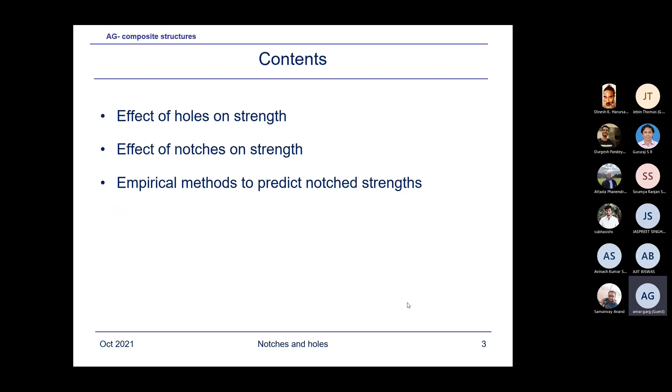Just a disclaimer, don't worry. So the contents are: effect of holes on strength, effect of notches on strength, and empirical methods to predict notch strength.

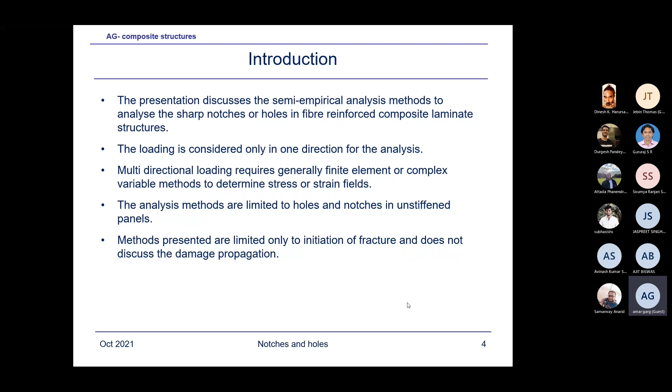As an introduction, the presentation discusses semi-empirical analysis methods to analyze sharp notches or holes in fiber reinforced composite laminate structures. We are not talking about metals in this presentation, it is only limited to composites. The loading is considered only in one direction for the analysis, so it's a limitation of these methods. Multi-directional loading generally requires finite element or complex variable methods to determine stress or strain fields. The analysis methods are limited to holes and notches in unstiffened panels, and the methods presented are limited only to initiation of fracture and don't discuss damage propagation. So this is just a brief background of what is coming ahead in these slides.

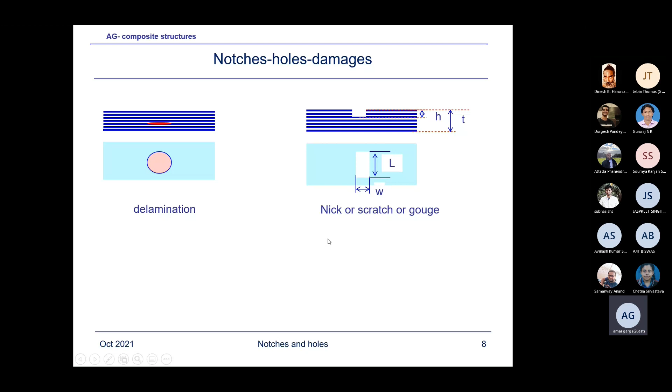Some of the issues: there are various types of damages in the composite, not all of which I have listed. Normally you won't have a clean hole like what I've shown in practice - on the structure there will be jagged holes, damaged holes, notches and slits which are sharp notches, and impact damages. You may also have delaminations, scratches, and other damage types, which I will just be touching on.

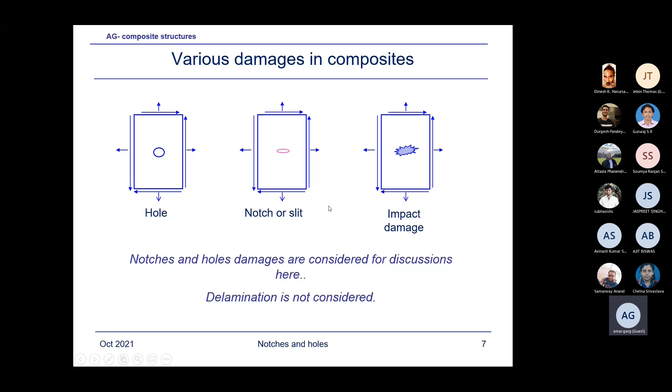The main thing is, once again, only unidirectional loading is considered - multidirectional loading is difficult. So I'll just be discussing the limitations of the methods.

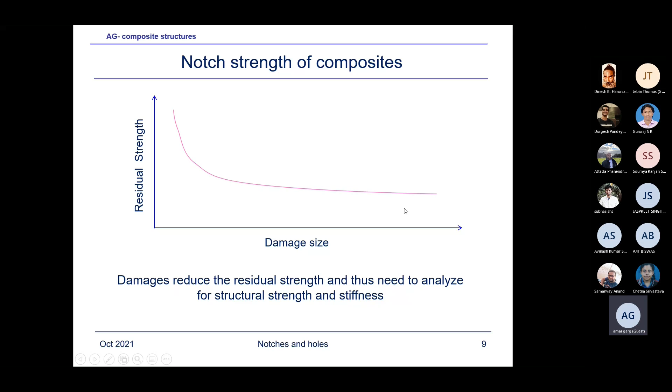Suppose the panel becomes very large, then for the holes, of course, the residual strength approaches asymptotic behavior, but for the crack it will keep on going down, which we'll show later on.

Issues for damages in structures include irregular damage shapes requiring idealization. So what happens is, when you want to analyze it, it's very difficult to analyze irregular shapes, so you have to approximate with some kind of regular damage shape for the analysis.

Then prediction of residual strength - the methods are very much limited in their applicability, which we'll discuss. Prediction of fatigue behavior is extremely difficult in composites. Prediction of damage growth is extremely difficult in composites using any of the methods available. Also the effect of materials and structural details on static and fatigue strength and various parameters.

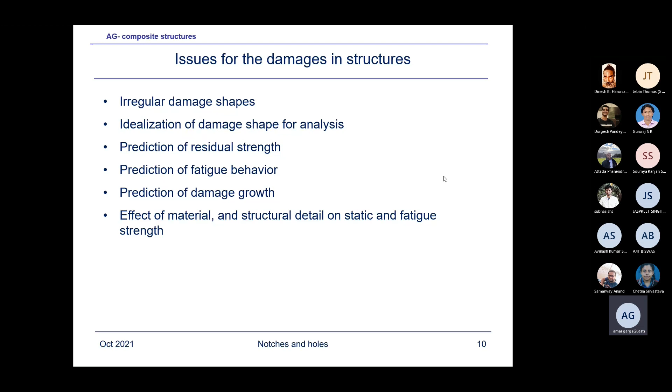So, damage analysis - circular holes, sharp notches - that's what we'll be considering now.

In this slide, what we are trying to show is the stress distribution ahead of the hole. In order to consider the effect of the hole on the residual strength, we use the stress distribution around the hole. Of course, this is only for unidirectional loading - for multidirectional loading we do not have any analytical expression available in closed form. We can analyze unidirectional loading easily, but not multi-axial loadings.

So here, what you see, Sy is the stress distribution ahead of the hole edge, and this is given by this function of R, and the distance from the edge of the hole is X.

Now if it's an isotropic material, you would consider isotropic material, KT is 3. So if you put 3 here, this is nothing but the expression for the isotropic material.

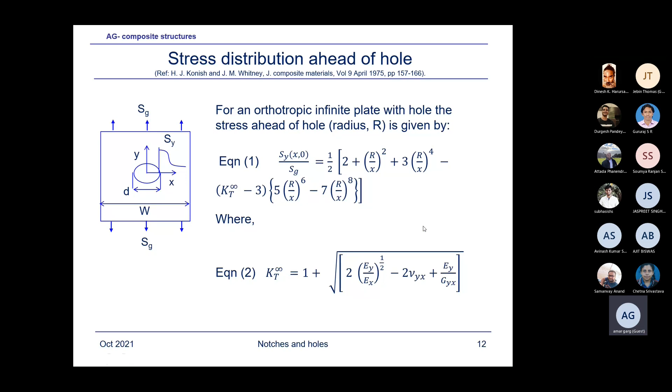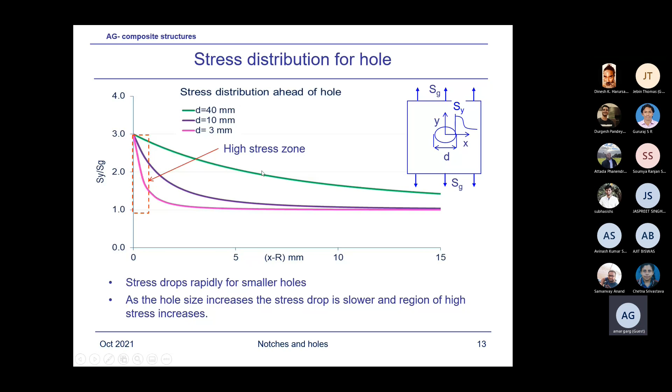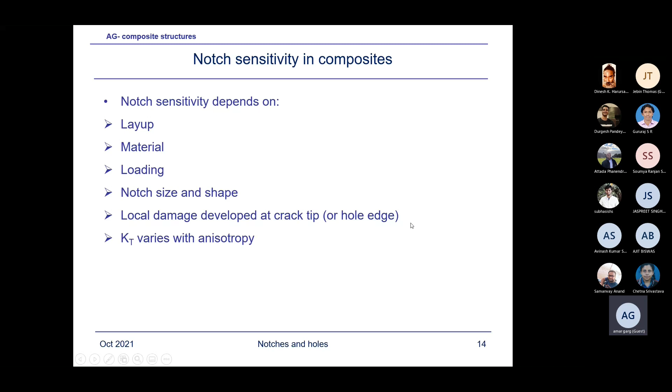Okay, notch sensitivity in composites. Notch sensitivity exists because the laminate or material is sensitive to the notch, and the notch sensitivity depends upon the layup, material loading, notch size and shape, local damage developed at the crack tip at the hole edge, and KT varies with anisotropy. I've just shown, based on this equation, this KT infinity...

Trying to give you an idea how the KT, which is 3 for the isotropic material, as you can see here. This is the 3 value for isotropic or quasi-isotropic material. But as the anisotropy increases, as you can see, the KT can reach almost 7.

What we mean by anisotropy, the percentage of 0-degree fibers along the load direction keeps on increasing for a layup. So if you have a unidirectional layup, say 100% zeros, that is a tape laminate, and if you drill a hole in it and try to load it, you will find the anisotropy. Due to this, the stress concentration factor is almost 7.

Whereas if you have 0% zeros, or suppose you have a 45 laminate only, plus minus 45, you will find the stress concentration factor of 2. So there's significant variation depending upon the type of layup we have, on the stress concentration factor. It doesn't happen with the isotropic material. Isotropic material is always 3.

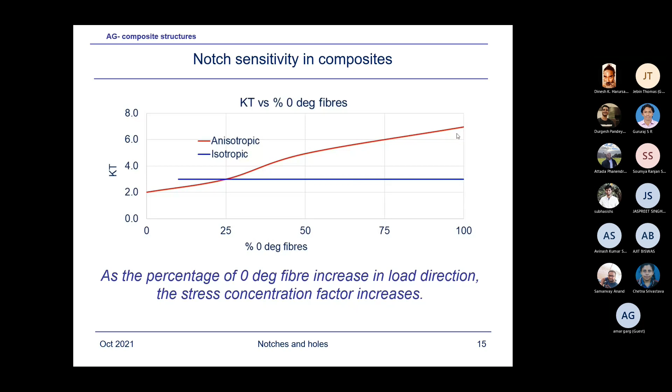Next is the stress distribution for the crack. Similarly, we have SG, the gross stress. So I have written here SY at X, 0, at Y equal to 0, is equal to X upon root of X square minus C square. This is from fracture mechanics considerations.

Now, what you would notice, this functionality for stress distribution is not dependent upon anisotropy. There's no anisotropy term appearing in this, whether it's isotropic or anisotropic, the behavior seems to be the same as far as the stress distribution is concerned.

Okay, now I've just plotted the stress distribution for the cracks. As you can see here, if you have a smaller crack, 2C equal to 5, then you find the maximum stress at the crack tip, near the crack tip. Of course, right at the crack tip, theoretically, if X equal to C, right at this edge, the stress becomes infinite.

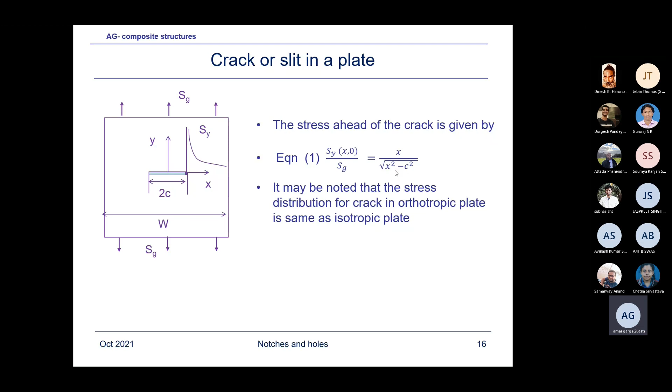That's a stress singularity, theoretically, from fracture mechanics. So here, of course, we have not gone to X equal to C because that would approach infinity. But what you can see, just away from the crack tip, the stress keeps on increasing as you increase the size of the crack.

Whereas we saw for the hole edge, right over here, X equal to 0, here X minus R equal to 0, the value SY upon SG does not change. It remains the same, like for quasi-isotropic or isotropic it's 3, whereas for the crack, it is a different value.

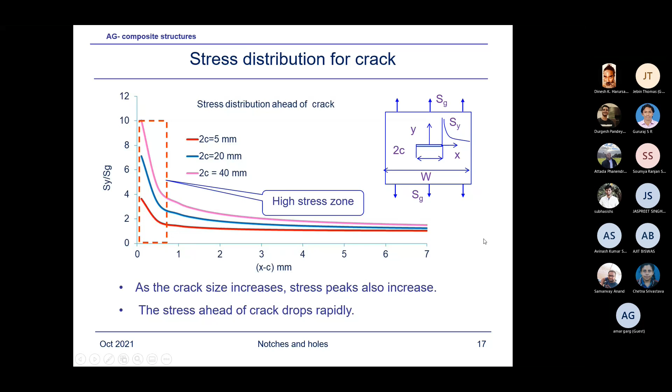Here I compared the stress distribution for the crack and a hole just to illustrate the difference in the stress distributions. Now, if you see the dotted line, this is for hole diameter of 5 millimeter and crack also of the same size, 2C equal to 5. What you see here, the stress distribution for the hole and the crack is very close to each other if the crack and holes are small.

But if the crack increases in size, like 2C equal to 40 millimeter, a long crack, and hole is also 40 millimeter diameter, what you are seeing from this stress distribution is that this is for quasi-isotropic. Hole stress has to be the same as we have seen in previous graphs for the hole. And then you have some gradient here.

But for the crack, this stress keeps on increasing significantly, and in this region, very high stress. What this tells us, if you look into this stress distribution, is that a 40 millimeter hole doesn't seem to be as critical as a 40 millimeter crack. Whereas a 5 millimeter crack and 5 millimeter hole might land up into the same residual strength. So that's the difference between the crack and the hole.

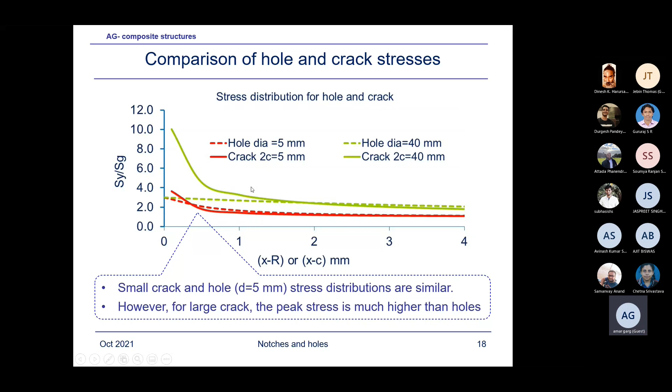Okay, so this is just a description, I won't go into the details of this slide. I just tried to show qualitatively what happens here, because this is important to understand all the empirical relations which have come up to predict the residual strength of a hole or a crack, based on this phenomena we are showing here.

This is similar to plasticity in metallic materials. As we start loading the laminate, at smaller loads some kind of small damage starts. Initially, the 90-degree fiber layers - the matrix will start cracking, transverse to the load direction, in the 90-degree plies, right near the notch or hole tip, because there are high stresses there. So naturally, when stresses are high, it leads to damage initiation.

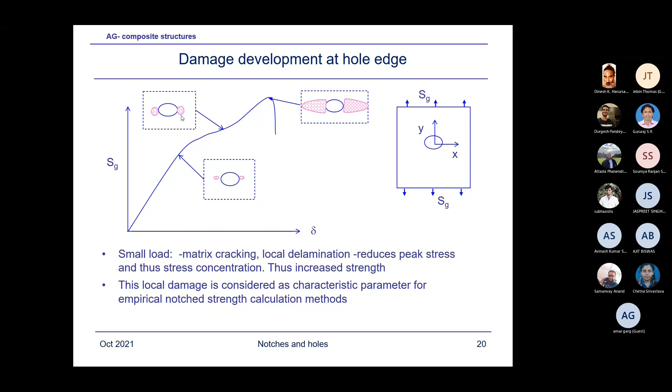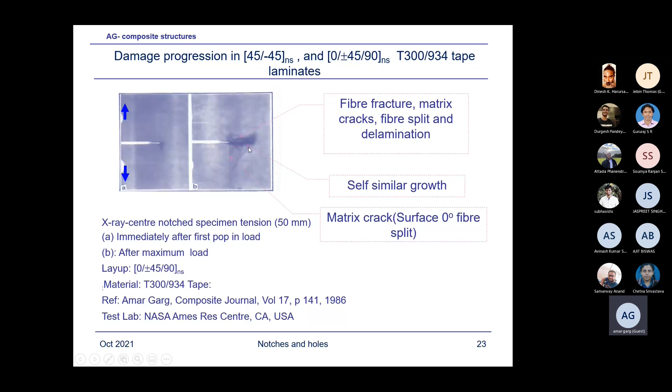Another one, this should be 0.90. Now, this is a bad layup. In practice, you would never use it. It's terrible because it will lead to delamination. As you can see here, in the loaded hole, near the loading hole only, the plies have delaminated.

What I had seen at that time, I didn't realize this is pretty bad, which I would never design like this, of course. But this gave me a good feel. I found that at this interface, it just delaminated into two parts. Clean delamination, virtually split.

I was talking about interlaminar stresses, and this is due to the interlaminar stresses. Very high interlaminar stress will exist because you are clubbing or bunching of the 0-degree ply and 90-degree plies. So you create very high interlaminar stresses, which is causing the delamination, as you can see here. It's a true thing, and you can see the effect of high interlaminar stresses, bunching of the plies together. So it's a good phenomena which is observed.

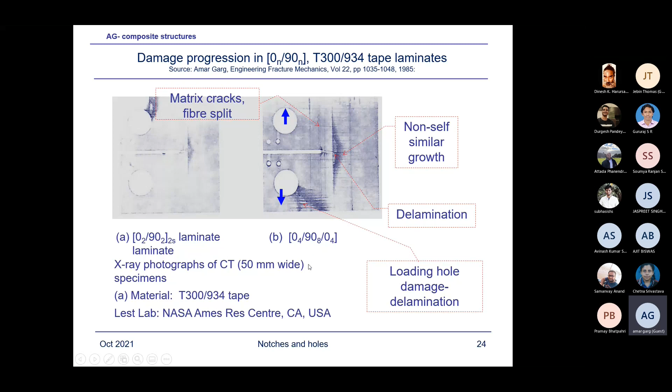Similar pictures, other damage propagations. Now this is not my work, this is from NASA, Christopher Poe's work, which I just take in to demonstrate. Suppose you have a unidirectional layup, then what happens? You will expect this is the original crack. And when you are loading this, you would find the crack cannot propagate this way. There are fibers, so it has to break the fibers.

The simplest path is because there is a shear stress existing right near the crack tip, and this shear stress causes the split. So the crack will propagate along the load line. This is a load line along this one. And as you can see, the crack is propagating along the load line.

I also experienced in one of my studies with a unidirectional laminate that it just split into 3 parts. This is separate, this is separated. So 1, 2, 3. Clean.

0 to 90S layup, also because there are a higher number of zeros, you find even though there's a 90 layer, still the crack is propagating along the load line. So why I wanted to show you this effect, we call in our study self-similar crack growth and non-self-similar crack growth. If the crack propagates along this line, that is self-similar, otherwise non-self-similar. The importance over here is that in composites, you would rarely see self-similar crack growth. They are non-self-similar.

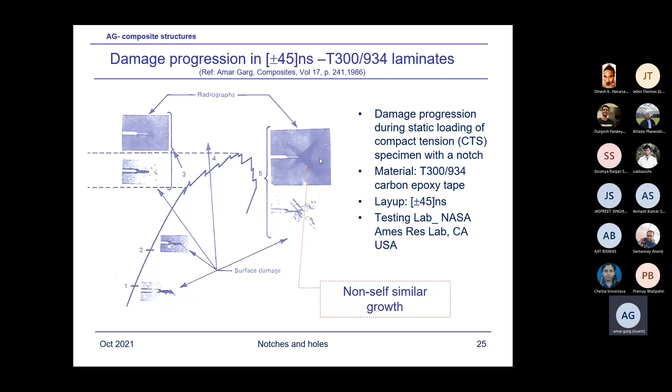Limited applicability to multi-directional loading, because our analysis methods are limited to only unidirectional loading here, and not suitable for non-self-similar damage growth. If you want to consider this phenomena, that is crack deviating from the path of the original crack, then these methods are not applicable. That is being predicted by using the FEM methods.

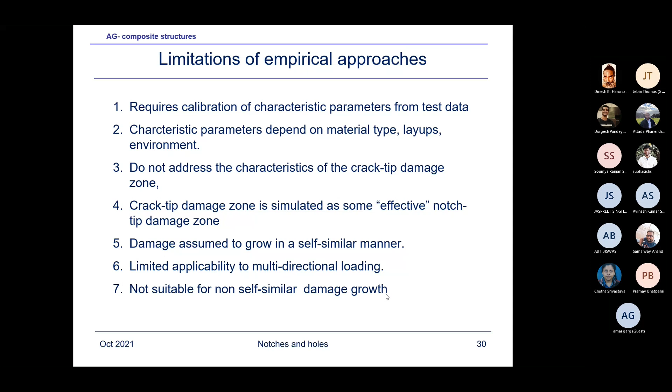There are lots of methods where crack growth studies have been done in composites. Damage growth in composite can occur by intralaminar damage or interlaminar damage. Intralaminar damage, that is within a ply, includes transverse matrix cracking, fiber microbuckling, fiber failure, fiber pullout. All these modes are considered when people model damage growth in composites using the finite element method. There are lots of methods available, but not a closed form solution for any of this. Interlaminar damage is the delamination, and there is damage interaction coupling.

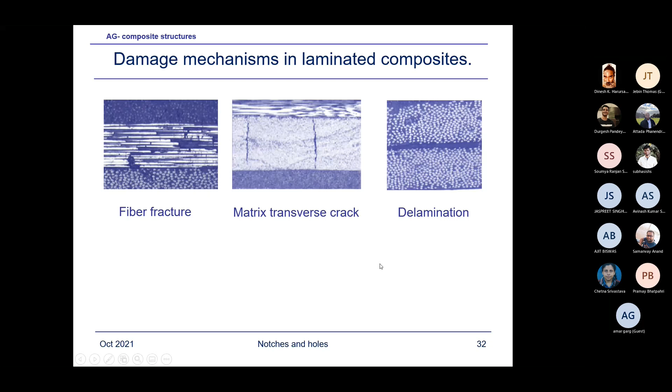Some pictorial presentations show fiber fracture, matrix transverse crack, and delamination. Damage growth methods present the laminate as a homogeneous and anisotropic material, with intraply damage, interlaminar damage, and continuum damage mechanics, where damage is represented by a reduction in corresponding stiffness. I won't go into the details of this.

I just wrote some points about damage growth methods and interlaminar damage, interface fracture modeling such as cohesive zone models and virtual crack closure. These are being pursued a lot. In fact, tomorrow I'll send you some references about this and also these ones. So those who are interested in pursuing further studies, an interesting area, or maybe PhDs, can use it. Damage interaction coupling, okay, I won't go into that.

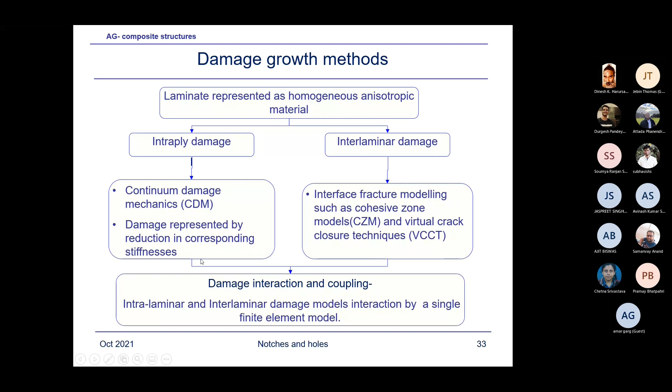Now, notches or holes, residual strength evaluation. Holes first, I'm considering. Now, the basis of point stress. One of the things, in fact, there was a reference about one of the publications by Waddoups in the beginning, and I said I removed that work. I used to have those slides, and I thought it's getting too much.

But what they did, before, in fact, Whitney and Nuismer published their work in 1971. Vadoops and their team, I think they were at General Dynamics, studied some composites with holes. So what they did, they loaded a hole of about 3 millimeter, 4 millimeter diameter in fatigue, loaded for about 1 million cycles. Then after loading for about 1 million cycles at a certain loading, they then loaded to static because the failure had not occurred.

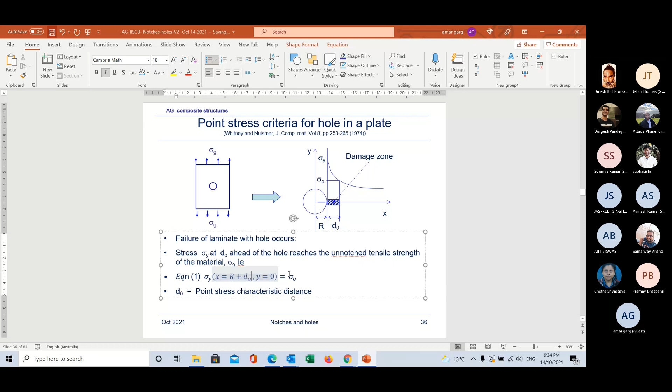That is, sigma y at x equal to r plus d naught. This is an error here, the comma should be here actually, and this should be sigma y equal to 0. So this should be deleted, sigma should be deleted, let me delete it here. So x equal to r plus d naught, y equal to 0.

So sigma y is sigma naught. That is when the failure would occur. And d naught is the point stress characteristic distance.

Now we had written down this expression, sigma y upon sigma naught. This is the stress distribution. So that means the failure occurs when x is equal to r plus d naught. If we substitute here, instead of x, r plus d naught, and solve this equation, that will give this equation, sigma n infinity. We are providing the infinity letter because this is for an infinite plate.

And if it's a finite plate, in terms of the width of the plate compared to the hole, the functionality of that we call the finite width correction factor, which will apply. So this is for an infinite plate, when the hole is small compared to the plate size - this is the expression for the residual strength, where xi is equal to r upon r plus d naught. D naught is the characteristic dimension, r is the radius of the hole.

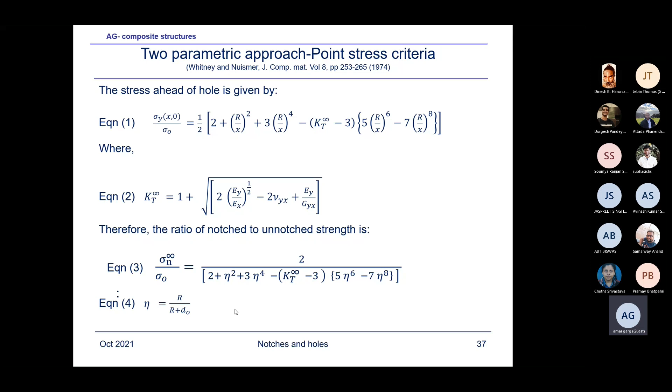You have to determine by test the value of sigma naught and d naught using notched coupons and unnotched coupons. So characteristic distances are determined by test. Determine the unnotched strength, sigma naught, of the test laminate by testing unnotched coupons. Determine the notch strength of the laminate specimen for the hole size - suppose this is a D diameter, so test this coupon.

Determine the appropriate KT for the laminate. Using the ratios for the notch strength, calculate the characteristic dimension D naught from the test data. So in this equation, if you know sigma n, you know sigma naught, so the only unknown here is eta, which is a function of D naught. So you can calculate D naught using this equation.

The characteristic dimension d naught may vary with the hole size and layups, so there could be variation, of course. It is a function of the material, layup, environmental conditions, and hole size. So you might have to generate some charts in order to cover your design space for various layups, because in the design, you would be having various layups, various percentage 0-degree fibers, environments, and hole sizes. So you have to cover for all those parameters, generating charts of D naught as a function of percentage 0-degree fibers, hole diameters, layup sequences, and so on, whatever the parameters are for the environment of the design.

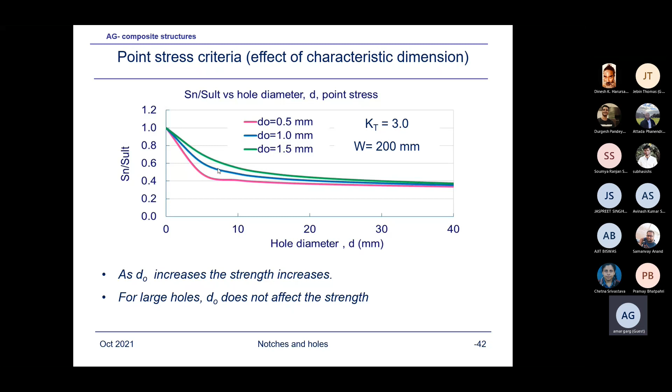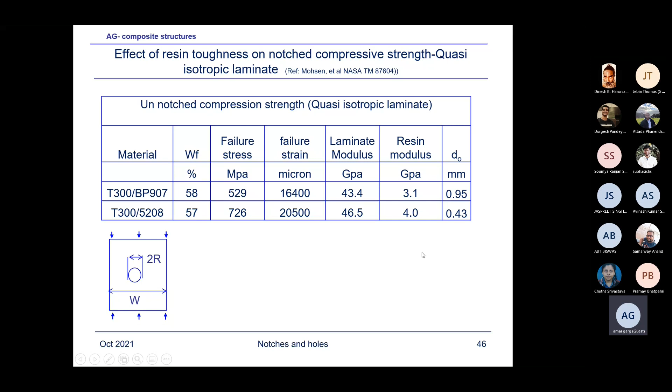I think the hole diameter is 6.4 millimeter, quarter-inch, if I'm not wrong. So failure stress is 529 MPa and 726 failure strain, characteristic dimension, and as you can see here, resin modulus 3.1, 4.

Hello. Hello, yes. Sir, good afternoon. Sir, before applying the point stress criteria, each and every time we have to calculate the D naught value.

The thing is, when you are applying the point stress criteria, you need to calibrate your D naught using the test data.

So what happens, suppose in the design office we are working and we want to predict the notch strength, the hole strength. We would have generated by test data various charts, as I said earlier. Normally we'll draw charts like D naught versus hole diameter for a particular material, and also as a percentage of 0-degree fibers for various layups. And that should be good enough.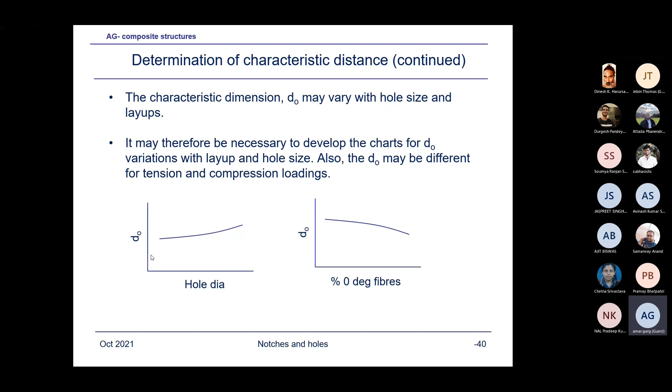And if you have a hole size greater than about 40 millimeter, as you said, then you don't need D naught, you just use this equation, KT — notch sensitivity, 1 upon KT. As I've shown here, in this region you don't need point stress, you can just use 1 upon KT.

So, right sir, suppose KT is 3. That means 1 upon 3, sigma naught by 3, is your residual strength for the hole. Simple. Thank you, sir. And this works well.

And that's why I've just put some data to validate this, to show you the utility of this method. And most of the time, I would use point stress criteria in the industry. I've used point stress quite often for predicting the residual strengths. So it's an important method.

Let me tell you that for an industry, it's an important method. It's simple, but very useful. This behavior is very useful — point stress over here, KT over here.

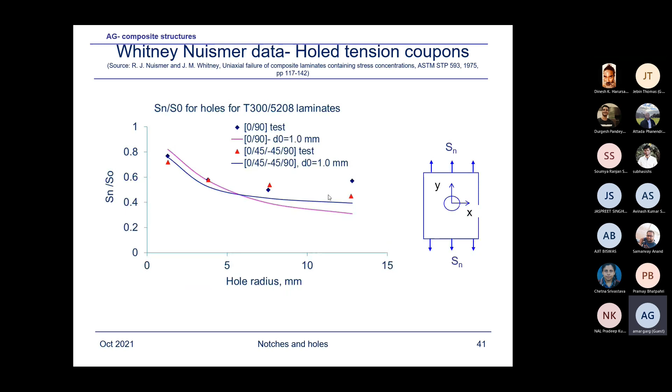I think what I can do is talk about the cracks. I'll stop here and invite some questions rather than continuing. So, any doubts, any questions so far on this?

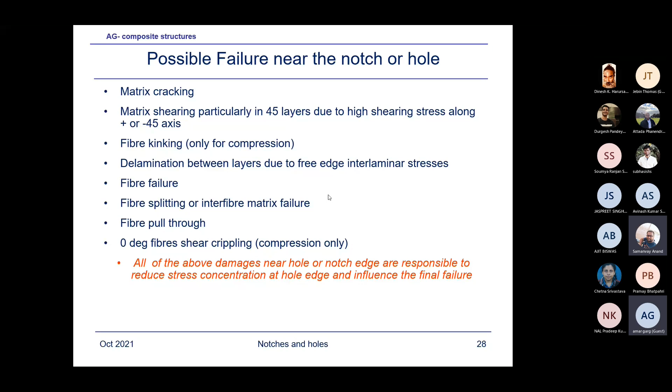Can you show the formula for the point stress method in the slide which you have? Okay, yes, let me just show you. Yeah, this one. Yep.

So this point stress method can be applied for both composites and metals, right? No, for metals we don't use this method. Only for composites we use the point stress method. That's right. And for metals, it doesn't matter how much.

What is the size of the hole? In metals, what happens? Because of the yielding, normally, if you're determining the ultimate load strength, you just use the net section stress, assuming that the material will yield, like aluminum.

And if it's a brittle material, you just use 1 upon KT. If there is no yielding, then the failure would occur with 1 upon KT straight away, even in metals.

If it's a brittle metal, the utility of this point stress method works because we are assuming this damage zone, which is relieving the stress concentration factor. If there is no relief, assume it is zero, that means the characteristic dimension is zero. And if it is zero, that means the stress at this point, when it approaches the unnotched strength, the failure would occur. So it's very simple, based on this stress distribution relationship and the damage.

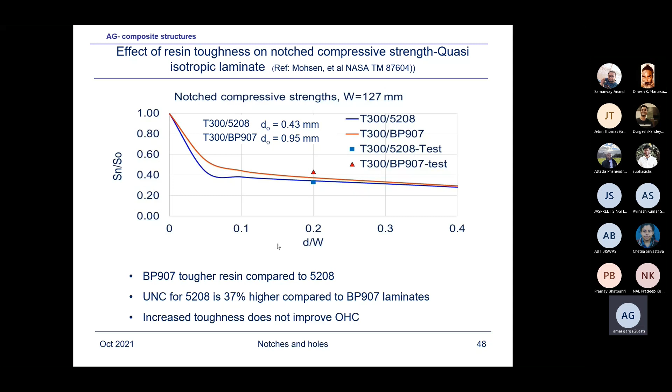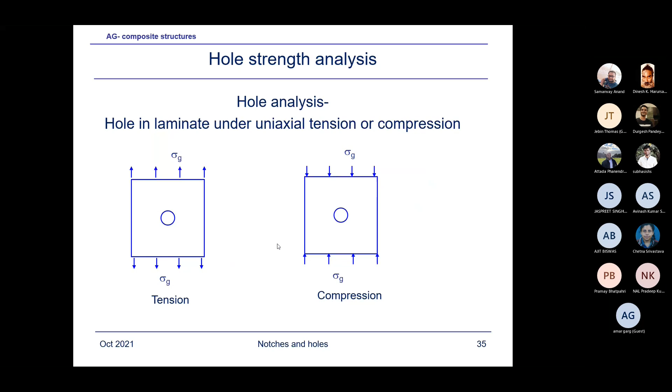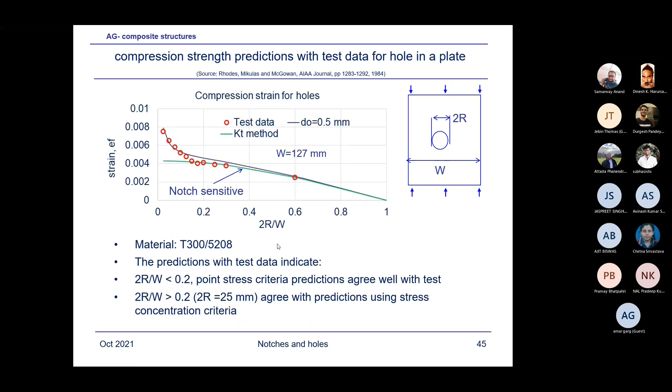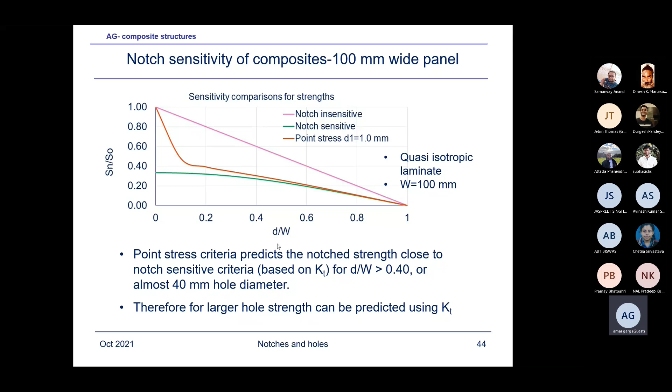So in fact, I wrote here that the characteristic dimension is a function of various parameters. Where did I put that? Might have removed it. I think I removed it while tweaking my slides - it used to be there. Let me see.

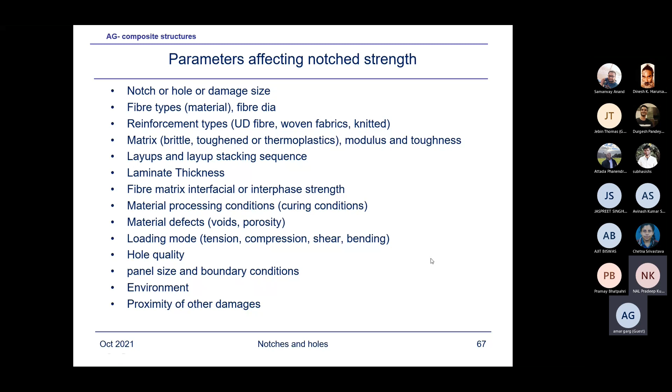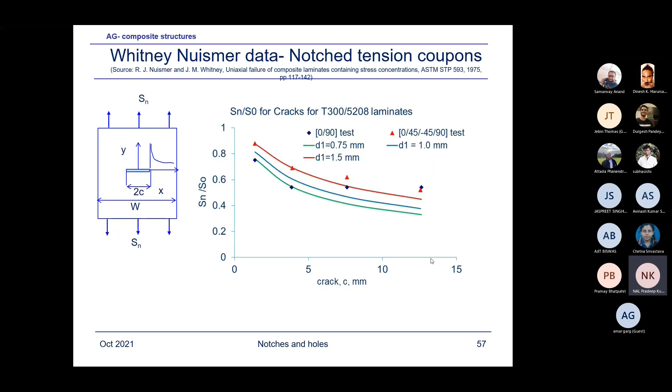Compression... hole damage here, parametrics, parameters affecting - so all these parameters do affect the notch strength, which is a function of various characteristic dimensions. But I'll make them clear in this presentation. It depends. Sir, is there any empirical relation to determine D, or is it obtained from both test and analysis?

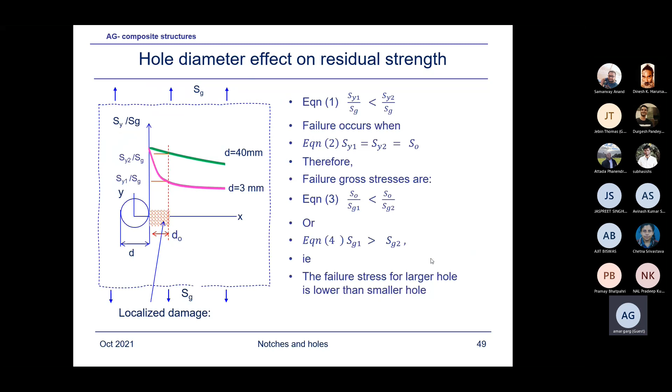Test and analysis. What happened was C.C. Poe Jr. tried to determine this based on test using this graph. Let me just go back to using this damage zone and classify it approximately, but it is difficult - how much is the damage zone D naught value from here? It's extremely difficult.

So there's no way, the only best way is to test the notched laminate and unnotched laminate, and using the equation predict the characteristic dimension. That is the standard way we always do it.

Rather than using the equation, some people might use the finite element method to predict that. But I found rather than using finite element method with unnecessary complications, I would use these equations which are simple and give the same result as finite element. I myself tested that.

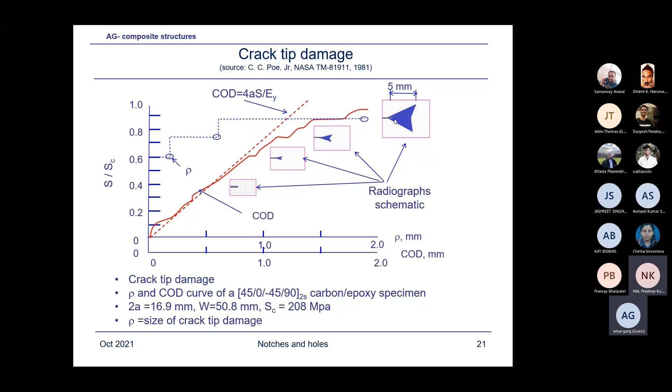Suppose it is a laminate, sir. So which lamina do we need to consider to determine the characteristic distance? You have to use the laminate, not lamina. Because in a laminate, different plies have different stress levels, na sir? Don't worry about it, you are talking about the gross stress, laminate stress, not the lamina stress. So average stress. Yes, average stress.

Suppose you are testing a laminate with 10 plies, 20 ply, 15 ply, depending upon the layups, load it and determine the failure load. Then you have unnotched strength. Using the equations which I have shown, you calculate. So depending upon your design layups, you would test for various laminates and generate sufficient data for your design space.

Sir, is this valid for both static as well as fatigue? No, fatigue is a totally different phenomenon. I'll talk about it later on.

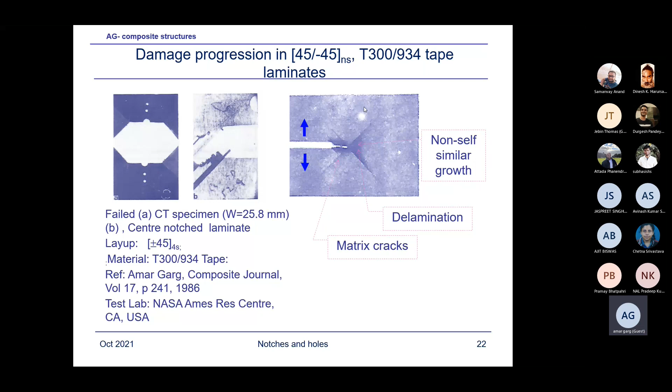And this is why I said you can't predict damage propagation. I made it very clear, we are just predicting initiation, not propagation yet at all. It's extremely difficult to predict the propagation. There are a lot of models, CDM, damage growth in composites, which I've mentioned in my slides, and I'll send you some references. In fact, there's a lot of interesting work.

References, if it is possible sir, we can understand better if you can share. Oh, I'll send the papers tomorrow. I intended to send today, I could not, but I've got heaps of papers.

There's no problem, they're all finite element method based and quite complex. Generally what happens with these methods, which I'll be talking about later, next week, using the finite element method - because complex loading is there, then you can't use these equations. Impossible.

You will generate the effect of various parameters using finite element method, validate the finite element method with test data using some coupons, element tests, or panels, and generate some kind of a surface parametric analysis using linear programming. There are standard programs available. And then using those programs, you will generate some kind of empirical equations. And that is what is used by the industry.

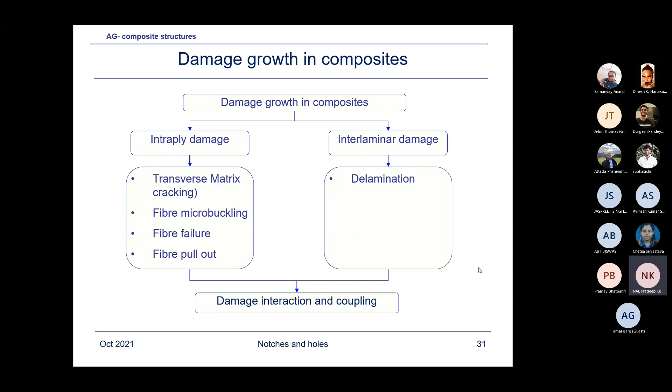So this is essentially, sir, you are talking about the static failure? Only static, yes. Okay. Under fatigue, fatigue is very complex, and you can't predict the behavior. In composites, normally we use the no growth phenomena.

In metals, we use growth because you can predict crack growth by dA/dN equals C delta K to the n, delta, by Paris law. In composites, except for delamination, there's no way through-thickness crack damage propagation can be predicted easily. A lot of work has been done, but there's no method available which can predict the fatigue behavior. That's why in composites, we do not use damage propagation at all in fatigue.

We design it based on no propagation, no damage growth. That is the criteria in composites, which I talked about in my certification discussion. Yes sir, and I'll be talking about it next week, about the damage tolerance and durability approach, which would be very useful. But sir, delamination growth is also a kind of propagation, just as in metal, sir.

Delamination is propagation in composites like a crack in metal, which people have tried to correlate using dA/dN as a function of stress intensity factor or strain energy release rate, similar to metal. Yes sir. However, my experience has been that in composites, the delamination jump occurs quite often under load. Suddenly the crack jumps, and that phenomena changes the behavior. In metals, the crack doesn't jump, it always grows slowly.